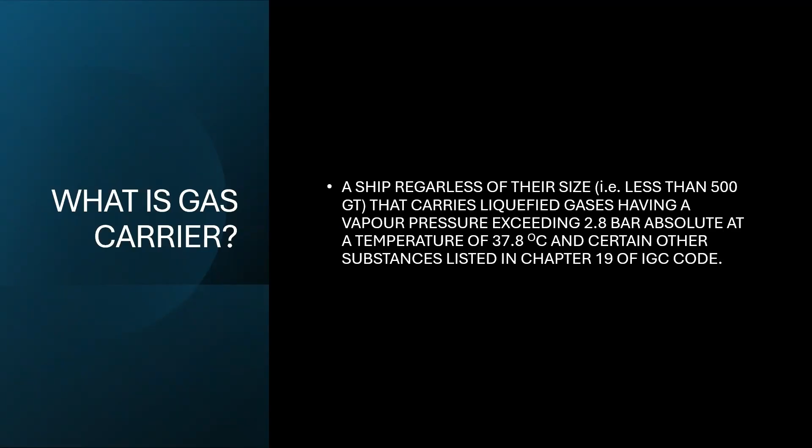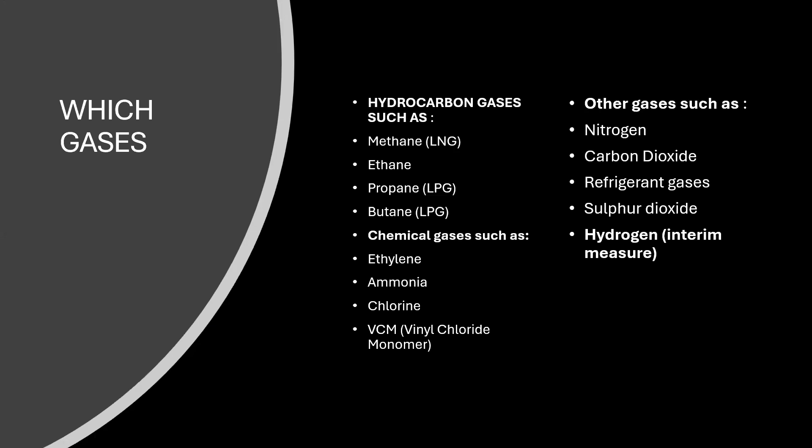Moving on, we will understand now what those gases are. Here I have just identified very few. There are close to about 100, I think, listed in chapter 19.

Quantity shipped is very less, and similarly VCM or vinyl chloride monomer, all these are basically used in the chemical industry. When we look into other gases, you have nitrogen, which is basically an inerting gas which is used, and carbon dioxide is used in the food industry.

There were dedicated, say 2000 cubic, about four gas carriers dedicatedly built to carry carbon dioxide, basically in Europe. But now it has come into more prominence because of our IMO direction, to capture all this CO2, and now we want to pump all this CO2 back into air pockets which we have harvested for crude oil and all, and we are storing it.

So now larger and larger gas carriers to handle and transport this carbon dioxide are coming. It is coming into the forefront. The smaller vessels were there, but now larger vessels are being designed, built, and recently started operations. Refrigeration gases were also carried on gas carriers, in limited quantities.

And we'll move on to hydrogen. Now this is another thing which is coming up. We will touch upon LNG, LPG, ammonia, methanol, all those things. Everything is basically transient in nature, but the fuels of the future which will be prominent are most likely hydrogen and nuclear.

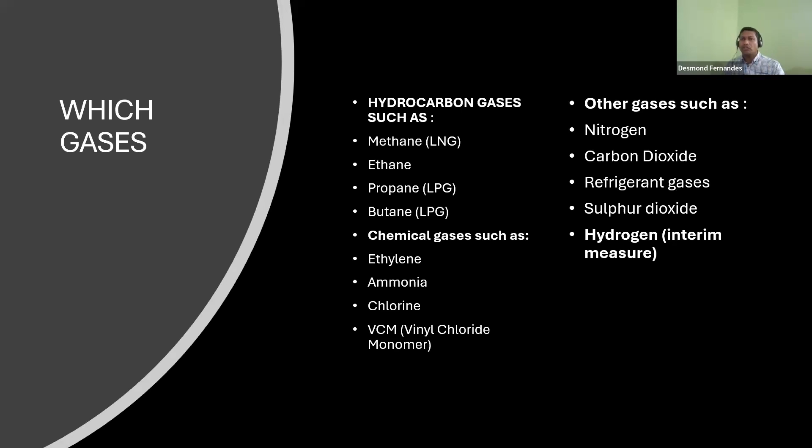So in the definition we said that regardless of size, we also said liquefied gas. So now that is what we have to understand. What is this liquefied gas? Why do we have to take it? Why is it necessary that we have to liquefy this gas?

When we talk about it, the ship is only a part of the tool in the logistics. We are using the ship to basically transport something. In case of gas carriers, it is the gases which we transport. So the main part over here is that it is part of a logistic chain which we have to understand. And when we talk about logistics chain, it is more of a commercial thing which basically comes in, and the basic golden rule is economic of scale.

This economic of scale has influenced shipping in a very drastic measure. Over a period of time, if you see the trend, ships are getting larger and larger. Why is it so? Because of economic of scale. Similarly, how does it become economical to carry these gases between different ports, basically a production location and a consumer location? That is what basically drives and controls this market.

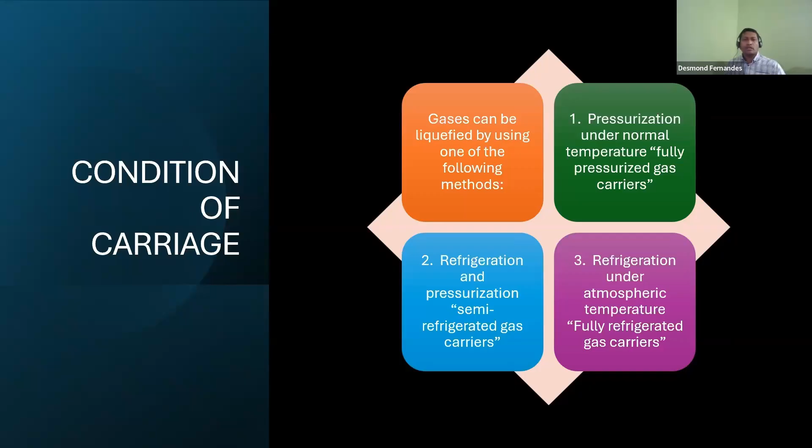Here I want to touch on another thing. Some gas carriers are only designed to carry one cargo, some ships multiple types of cargo. So that varies, and that's where a little bit of complication comes into the picture, but I will touch into it so that particular concept also gets cleared up for you. So we will just try to understand what is this fully pressurized gas carrier and so on.

So the pressures are basically 17.5 bar to about 20 bar, depending on what they are designed at. The tanks are basically equivalent to your air bottles at those 17.5 to 20 bar pressures. Obviously capacities are quite less, because what you will find is the thickness of the material is more, so the corresponding weight is also more. The temperatures it can handle - these are typically designed at 0 degrees, but it can handle down to minus 10 degrees while loading. So you cannot load a gas below minus 10 degrees, which is very important.

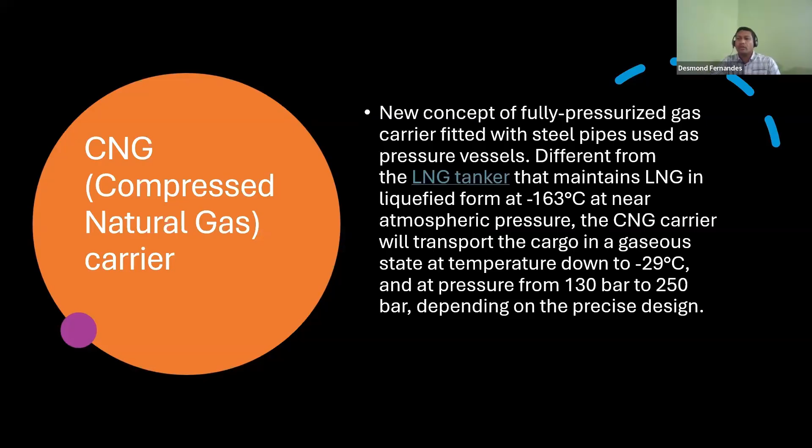They can again carry your LPGs, your VCMs, but another cargo they normally carry is ethylene. Ethylene, when we talk about it, goes to minus 104 - we will understand that. Since this is semi-pressurized, the pressure range is 5 to 7 bar. In the fully pressurized ships we saw 17.5 bar; here it is 5 to 7 bar, and it can go to, typically if it is LPG and such, minus 48 degrees, or minus 50 degrees. So then basically they are capable of handling your LPG cargoes also, in the fully refrigerated range.

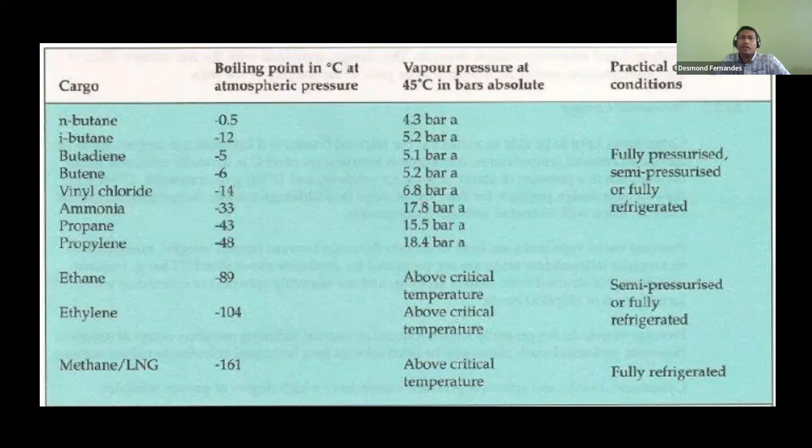Let us go back again to the previous slide. So here we have seen negative temperatures. Water freezes at 0, correct? So at this temperature, if there is water, it will form ice. However, the technical word we use here is hydrates, not ice. So if you find water over there, it becomes hydrates.

How does water come? It could be while putting inert gas in the tank. We remove the air by inerting, and then we take the gas over there. So if there is water in the inert gas, that is your source. Then we talked about liquefying, refrigeration. In a typical refrigeration plant, in the condenser you find water, right? Something similar plants are used on board also. So if there is a leak in your condenser, you find water in your tanks, or you load the cargo with contaminants itself. So these are some of the ways water can be found.

Sometimes this cargo also reacts with itself, like aging. There is a lot of talk about your VLSFOs, no shelf life, consume it within 12 months because it ages and segregates, decomposes, changes its state. Something similar you can observe with a few of the cargoes also. They have a very short shelf life, and they are also transported with inhibitors, depending on the cargo.

Then a few of it also reacts with the air. If there is air, then it will react and start changing its form. And also with other cargoes, for example, like we spoke about this VLGC. They are designed to carry LPG, that is propane butane. They can also carry ammonia if designed so, but then they are not compatible. So you have to do inerting with one cargo and then introduce the other cargo. So those are the things.

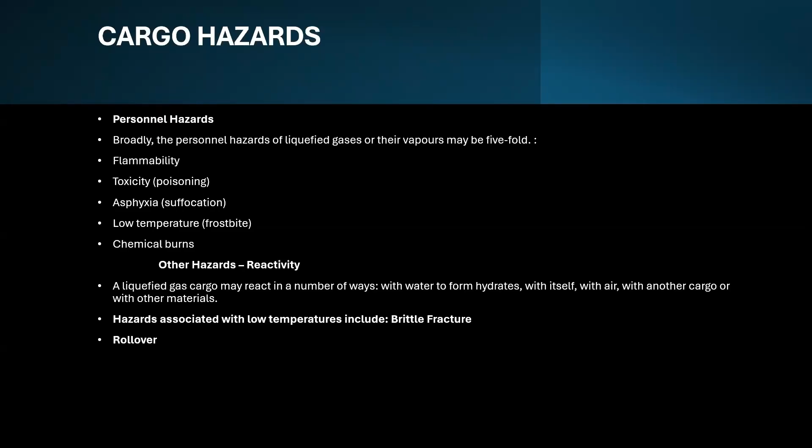In rollover, what basically occurs is in your LNG ships, this is more pronounced. There is a stratification. So if you take a tank, say 50% of the tank, you divide the tank into 50%. The top half will have LNG as cargo, but the density is much higher, and the bottom part, the density is lower. This basically occurs when it is on a long voyage, it doesn't happen in an instant. So over a 2-3 week period, you find that stratification is occurring, wherein higher density accumulates on top, lower density at the bottom. Now the natural tendency is that higher density has to be lower, the lighter particles basically on top. That is the natural tendency.

So obviously as the weight increases, it reverses, changes over, and this is an instantaneous process, and it results in stability issues. Now try to relate it with your naval architecture. As density increases, the weight will also increase, right? And within a minute or so, imagine it is just changing over. So there is a change of weight, so your metacenter and those things will change, and it basically affects the stability of the vessel. So that is what rollover is all about. These are a few of the cargo hazards.

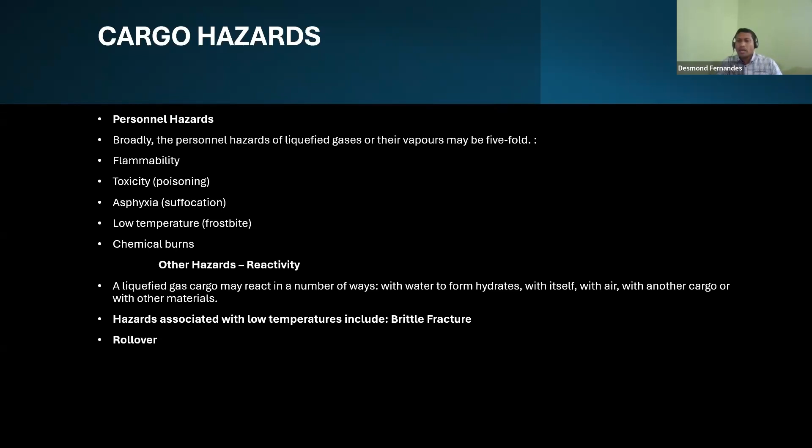So in order to have control in all of this, IMO basically came up with a code, the IGC code, short form. Full form it stands for International Code of Construction and Equipment of Ships Carrying Liquefied Gases in Bulk. It is a mandatory requirement under SOLAS Chapter 7, and it has been since 1986. The latest version is 2016.

Now what does it govern? It basically looks into the design, the construction, and the equipment which have been fitted, with the lens of minimizing risk to the ship itself, to the crew, and to the environment. These are the major focus.

Now here I'd like to tell you something. You must have read in the news, LNG is coming in a major way for use as a fuel for propulsion of the ship, for generating electricity on board. Similarly you will find LPG also being allowed, and hydrogen is also coming. Originally, LNG was the only gas allowed for propulsion purposes on a ship. LPG was not allowed. LPG and all basically came under the IGF code.

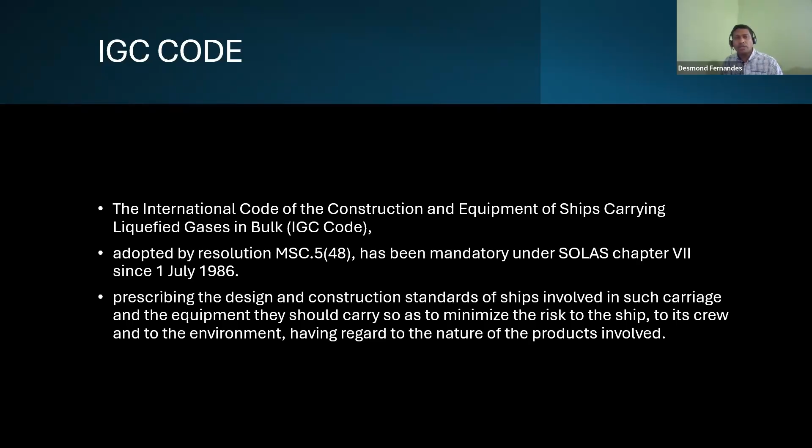Since the IGC code specifies how the ship is designed and constructed, we'll see which are the special features. We'll look into the special features which make a gas carrier apart, based on the cargo it carries, the physical aspects of it. We will try to understand all those.

One thing you will find on a gas carrier, especially semi-pressurized and fully refrigerated types, is something known as an airlock. As we've said, these two ships will have a refrigeration system to cool down.

You can relate this to a normal refrigeration system on board, like for the provision system or the AC. You have a compressor driven by an electrical motor, that is your drive, the prime mover. Similarly, here you have a compressor driven by an electrical motor. We keep both pieces of equipment in separate compartments, and the drive shaft passes through a bulkhead common to both compartments, with a gas seal provided on it. The electrical motor room is known as the motor room, and the compartment where the compressor is located is known as the compressor room or cargo compressor room.

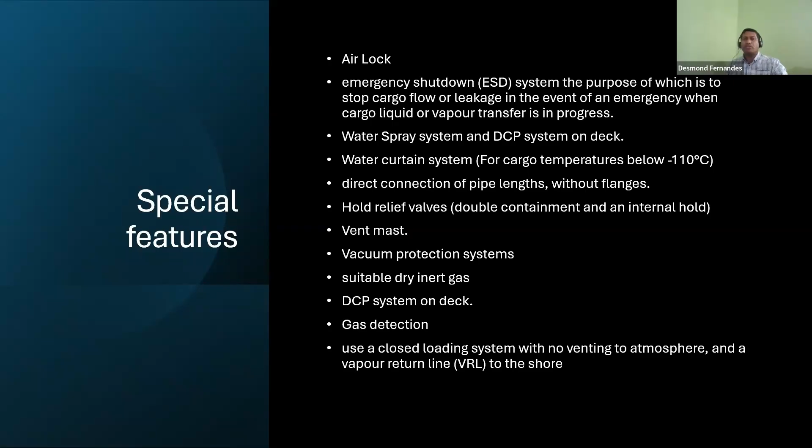Now having known this, we will try to see some of these features on a gas ship. Moving on to a pressurized ship, you will see your cargo tanks, just like your air bottle tanks, basically placed in your cargo hold. Part of it is protruding; it is just directly painted, there is no insulation involved here.

This is your actual metal. Only for corrosion and all, you are doing the normal painting and paint schemes which are there.

Here you will find basically your mast which you can see, one mast for each tank, dedicated ones. The relief valves basically will be connected to those, so anything venting is on top, so there is no accumulation in way of the tanks.

Second thing, over here in the aft section, you will see the electrical motor with a straight drive to a centrifugal pump. It's a cryogenic pump which is basically used to pump. Okay, this is a straightforward system.

Things get complicated in a semi-pressurized system. Here you will find one specific room on the deck which is known as a compressor cum electrical motor room, where the refrigeration system - actual word is reliquefaction system or plant - that is the word being used. It's basically a refrigeration system where the compressor and electrical motor are used.

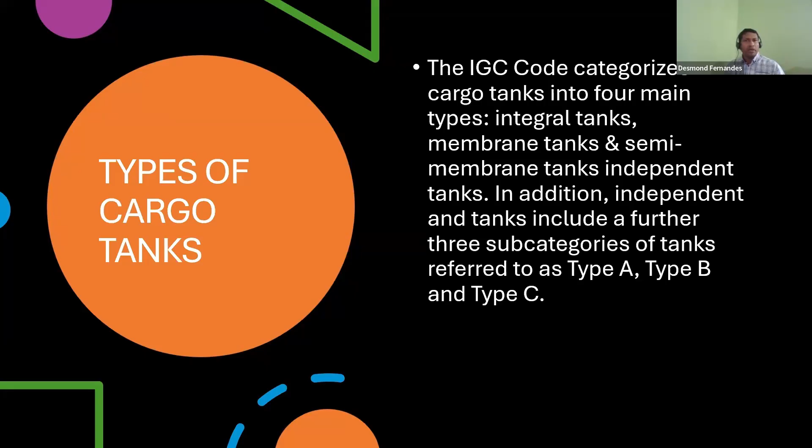So we will just try to understand another concept of the tanks. We will understand the tanks. Now IGC code basically has categorized into four main types - integral tank, membrane tanks, semi-membrane tanks, and independent tanks. We'll just have a look at what those are. This is basically what IGC code talks about.

Integral tank is basically where the hull of the ship directly forms and contains the gas, and it is normally not allowed. So integral tank, they don't allow you to carry this sort of cargo.

Then the other one, like in LNG ships and all we have seen, is membrane tanks. The design part we will come to know, but here the requirement is they want a complete secondary barrier - so if the whole one tank is there, they want another concentric lining along the tank, so it's a tank within a tank, you can understand. Then you have something known as semi-membrane tanks, which basically again want a complete secondary barrier.

And the third one, fourth one, which is important and predominantly used in gas carriers, are independent tanks. So there's an individual tank basically placed in the hold of a ship. They are subdivided into Type A, Type B, and Type C. In Type A, basically a complete secondary barrier is required. Type B is partial secondary barrier, and Type C there is no secondary barrier which is required. We'll look into why it is what it is.

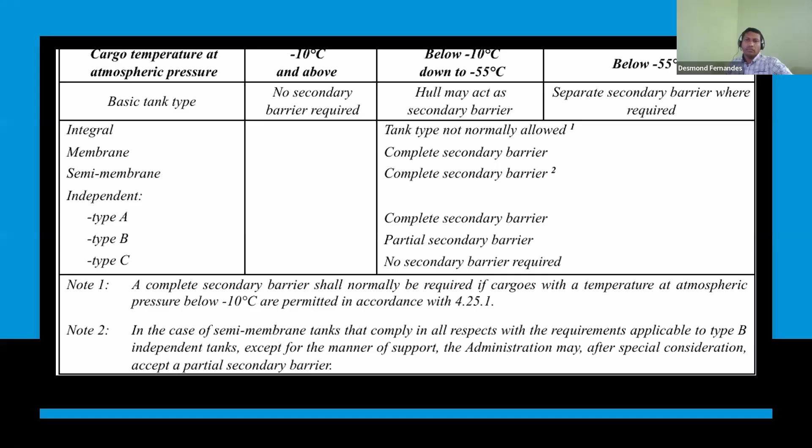Don't get confused into all those. So here another thing is below minus 10 degrees down to minus 55 and below minus 55. So predominantly this is what it is. You will find membrane tanks which have taken utilization, and independent tanks which are predominant. Other types are not generally used or favored, like the tilt is towards that.

So we will understand now what is this independent tank. You see this is the outer hull of the ship. Then you have hopper tanks, water to carry water ballast, and you have a double bottom for water ballast. So in between you have that space, the hold space, right? In that you have a tank which is placed. Now this design is prismatic. It looks like a prism, correct?

So we have seen now a prismatic Type A tank basically will require a secondary barrier, a complete secondary barrier. So that is basically what you can see inside the tank. You find a little bit of insulation, and then you have another basically tank lining which comes into the picture. So tank within a tank.

These are basically supported like foundation of a main engine or pumps and all, you will see, but it is not bolted like those engines or pumps that you normally see. You will find that there is a wooden piece, a special type of wood basically, and it is just rested on that. So if there is water and all, if there is a rupture in the hull, say side shell, and water will come in, depending on how much water, and if it is filled with cargo, because each cargo has its own density, these tanks can float and displace. They are basically within a tank, just placed. It is not secured. So that is what the main thing is.

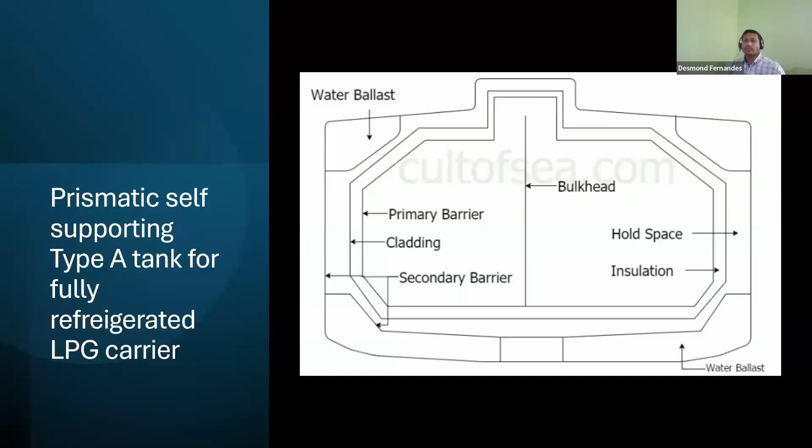So what you have is basically a small tray beneath, which is of low temperature material, right? And if there is any leak, basically it is contained. Now all the secondary barriers, when we are talking about, IGC talks about and tells that they have to design such that it has to hold that cargo for a minimum of 15 days. In this 15 days, the moment you discover, then you have to go to a port and all, and then you have to discharge the cargo. So it gives you that 15 days grace period to unload it.

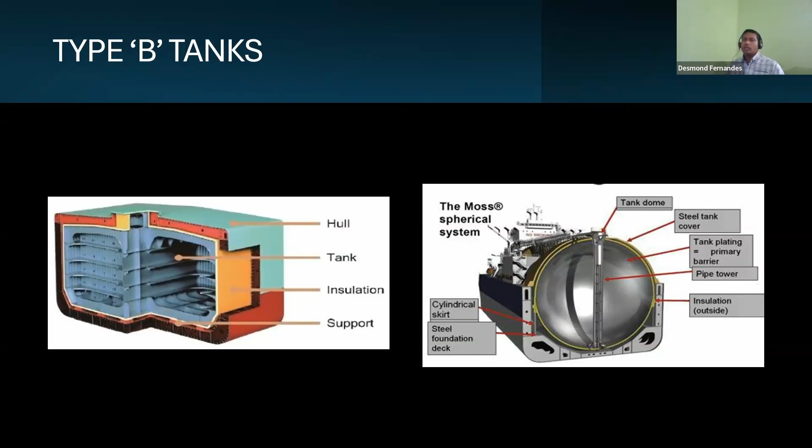Now this SPB, what I talked about, if that particular tank is installed, it has a flat deck, same to what you will find as an LPG ship. These ships were, again, the cost factor of those are higher, so they are not being utilized as a project. Only two ships or something were built and they were running, so most likely they are close to, either scrapped or at the stage of scrapping. These are quite old ships.

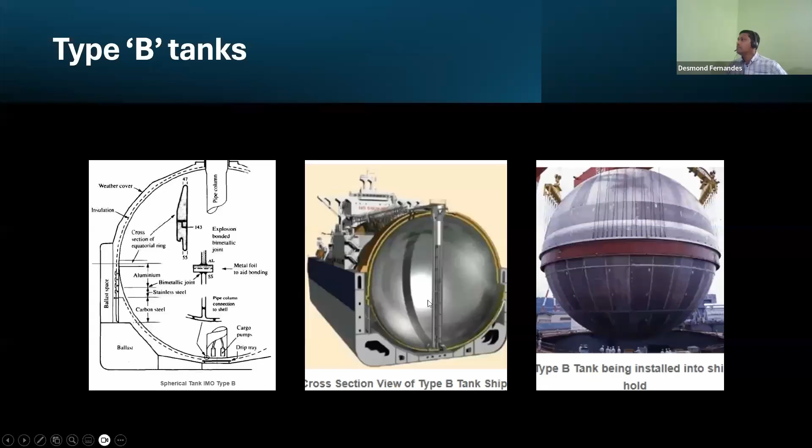This particular tank technology is not predominantly favored. Here you can see on the right hand side, this whole aluminum based tank, with a nickel alloy, being fabricated, and then they are basically lowered in. So this is how they look. These are type B tanks, independent type B tanks.

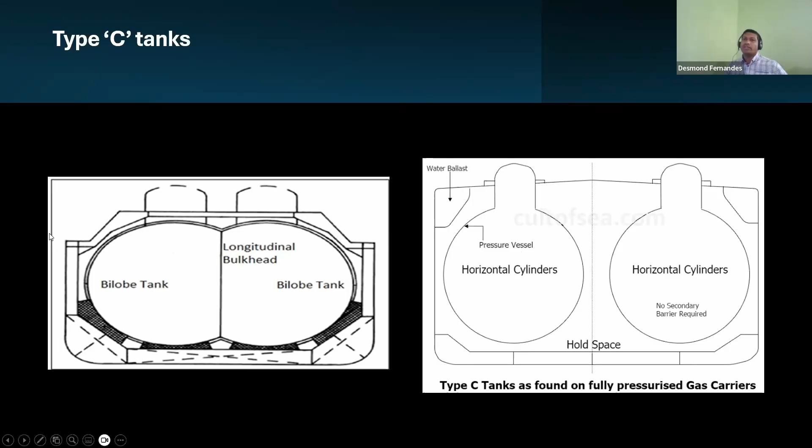We'll see another picture wherein they are installing. You see, the outer hull is prepared, the hold is there, and these tanks are just lowered in, and then they are going to cover it. So these are individual tanks lowered.

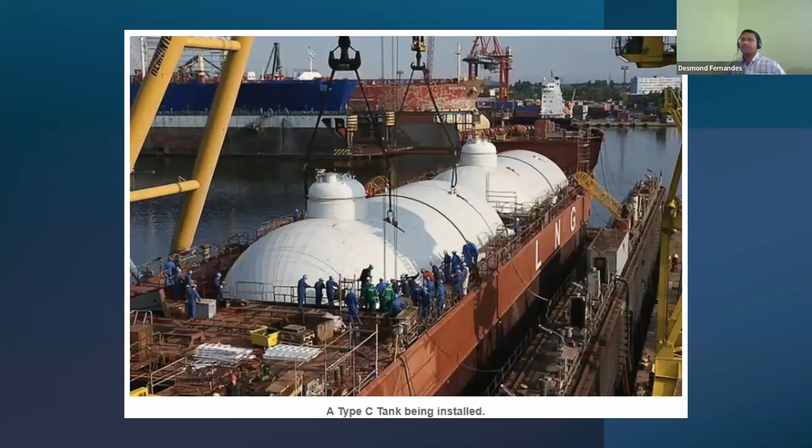We'll look into membrane tanks. These are basically what you will find on ethane carriers and LNG carriers. The outer hull which is there, you have this as ballast tanks. Against that you will have the first plywood or something which is put, in which basically you will have insulation. Then you will have the first metal sheet which comes, and it is known as the secondary membrane.

On top of it you will find another insulation layer covering. Membrane we have seen, complete secondary barrier as per IGC. So you have the secondary barrier complete throughout, and then you have the primary barrier, in which the sheet that is there will be in contact with the cargo.

Now in between you'll have towers in the tank, wherein the pumps - main cargo pumps, stripping pumps, spray pumps, depending on the type of system - will be mounted. And here you will have another small opening which is only opened for the gases, where the vapors are removed, known as a vapor dome. So you have a liquid dome and a vapor dome.

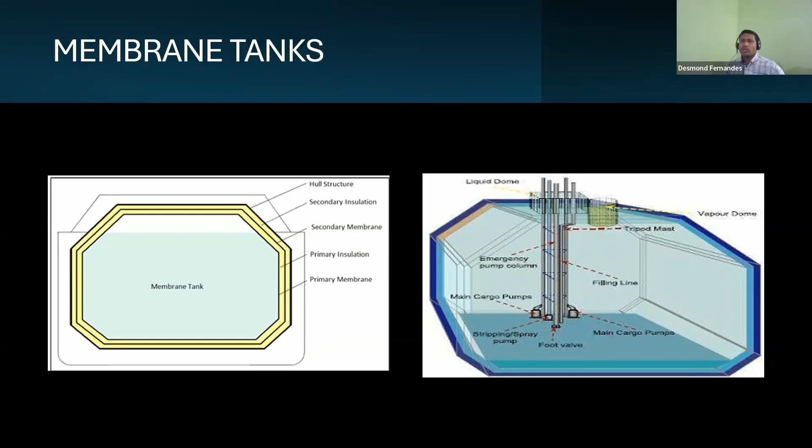So we'll just look into an actual tank. Again, it is a prismatic design, with the tower which you can see supporting the pumps. This is not touching over here, there is a clearance, and it is a floating design. Whatever weight of the pumps and everything is basically on the top - that is the main highlight here.

The design for this prismatic type - we have seen these are like sheet metals, and it is basically clinging on to the insulation, and then the plywood and all, which we will see in subsequent pictures. So what you will find is, if liquid is over here, there is a lot of sloshing, and there is no division within the tank, which can get destroyed.

That's the reason why there is a limitation - you cannot load half of this tank and sail, they don't allow it. Only LNG ships used for bunkering, within port limits, are allowed. But if it is sailing, they are not allowed.

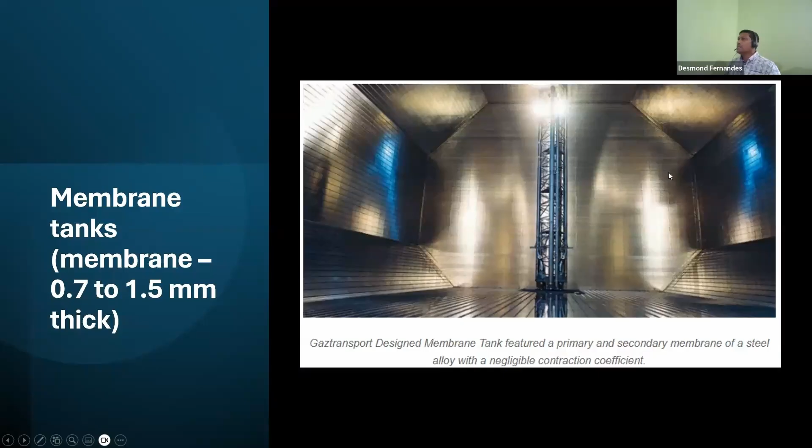So you have to have the liquid somewhere around a certain level. Obviously you can see the surface area and the volume is quite less, so if there is movement, the sloshing load will be much less, or it will be closer to a minimum - that is another design feature which you will usually see.

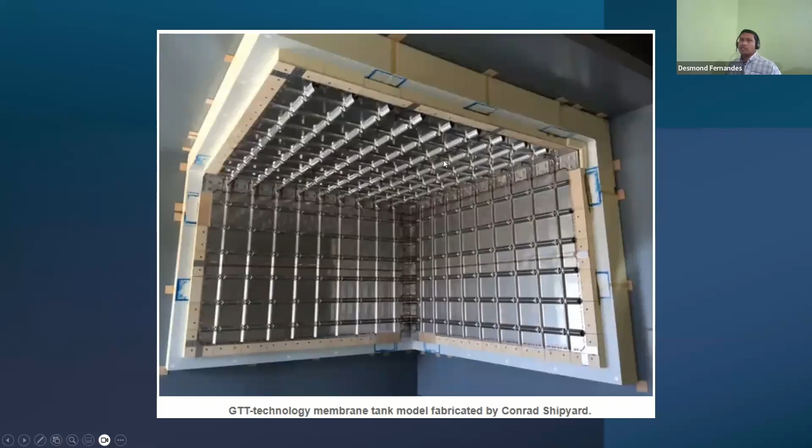So here you can see this sheet metal example - it's basically bent for two reasons. One is to give strength, because complete sheet metal if it's plain will not resist forces. Second is to allow for expansion and contraction because of cryogenic temperatures. This bend basically takes that, and then you'll find all this insulation held in place. I have a few more pictures to show you.

You have like Mark 3 and NO96. The main difference here is the material. In NO96 you'll find Invar being used, and the thickness is 0.7 mm. When you install Mark 3 systems, you normally use stainless steel of 304 grade, with thickness about 1.5 mm. Then the type and thickness of insulation also varies - that's what makes things different here.

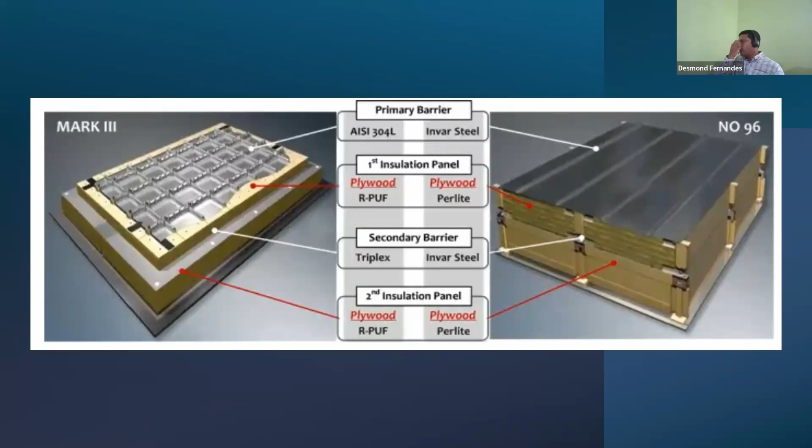These are the main highlights - what matters is reducing the boil off. Boil off means how much vapor generation is controlled relative to the total capacity of the tank. So here we can see the sheet metal, how it's done - it's cut and prefabricated, then just assembled in the tanks. So these are all about membrane tanks.

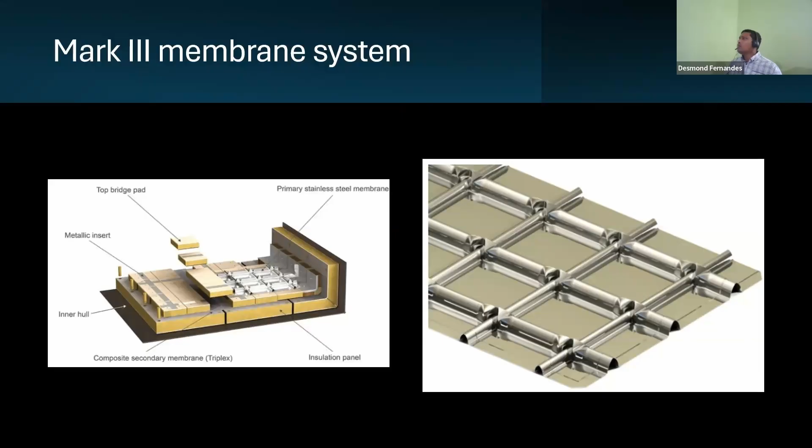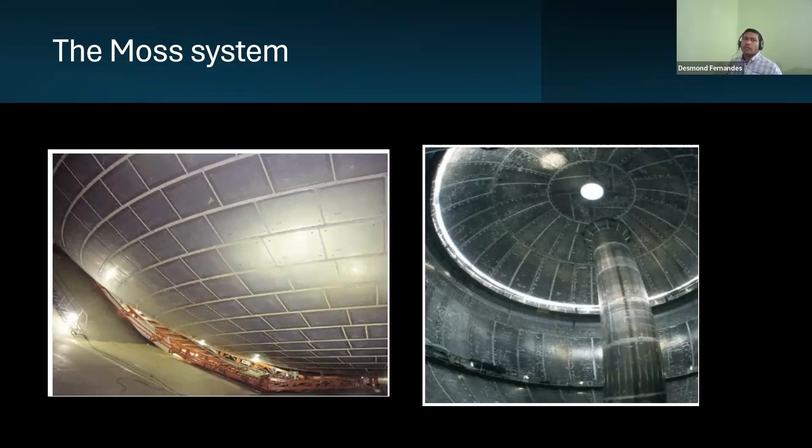Then we will just touch upon how pressure is controlled. One thing we've mentioned is reliquefaction of cargo vapors - you have a refrigeration system basically equivalent to the one you have on ships for accommodation or provisions. You take the vapors, compress them in a few stages - two or three-stage compressor - send it to a condenser, liquefy it, and that liquid is sent back to the tank.

Now what happens is this becomes very uneconomical when we come to methane. So you might utilize something known as thermal oxidation, which in simple terms basically burns the cargo - whatever vapors are generated, you just burn it off. It's a huge tower with a pilot igniter or spark plug and blowers. You're dumping in a lot of air, opening these vapors into it, and just burning it off. Also known as GCU, gas combustion units - these are also used to control your tank pressures.

Another thing is pressure accumulation. What you'll find is some designs will have dual pressure rating - sometimes you'll find sea mode and harbor mode. Sea mode is normally the lower pressure. In harbor, when you're loading and such, pressures will go higher, to buy more time to use your reliquefaction plants and bring it under control. So you can choose to change the set point of the relief valves to a higher value.

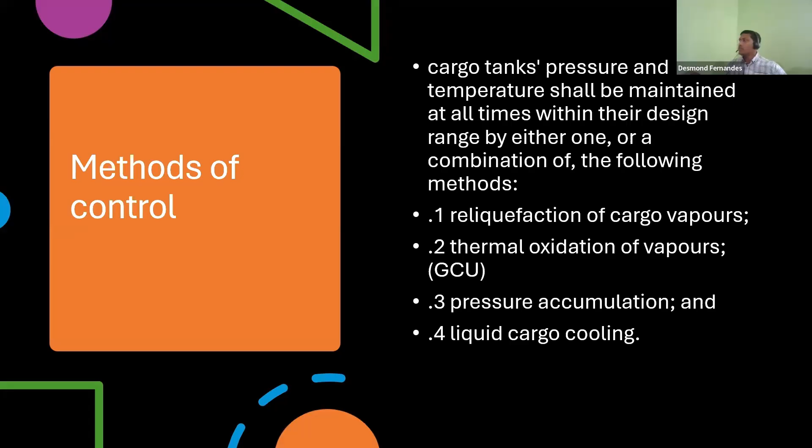Then you have liquid cargo cooling, wherein the liquid is taken from the tank and passed to a heat exchanger, using nitrogen and refrigeration plants to cool it again to say minus 167, and then you resend it. So here you are not cooling the vapor in liquid cargo cooling, you take the liquid which is close to say 160.5 or 159.2 degrees, that is the temperature of the liquid - it is in liquid form itself. You take it from the cargo tank, cool it to minus 167, and return it back. So that is also being employed to control.

Going forward, in the reliquefaction plant or refrigeration systems, you have direct systems, indirect systems, and combination systems also - multiple types. On LPG ships, you usually will find direct systems. On ethylene carriers, you will find indirect systems, where another refrigerant goes into a heat exchanger, and you take the vapors of ethylene, cool it, and redirect it.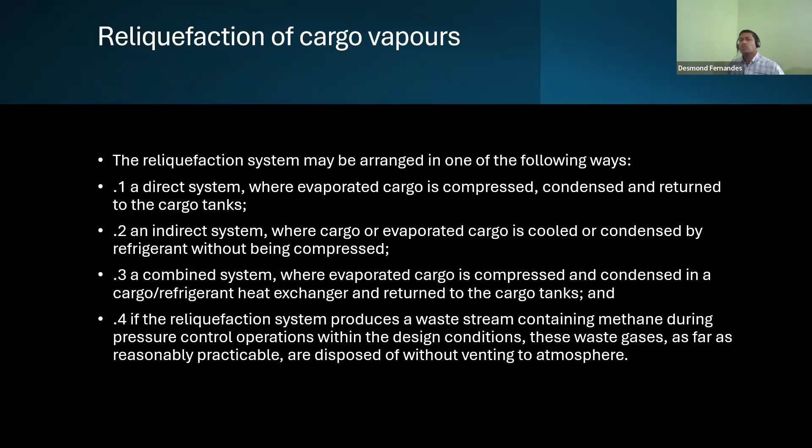So these are some means of handling cargo vapors, care of cargo during voyage and also during loading times. So moving on to the last topic - I've exceeded the time, thank you for being patient.

So we will just try to understand some of these cargoes the gas carriers are using - they found their purpose as a fuel. We'll start with LNG because that was the first thing which basically came into the picture.

I also mentioned that they are transient in nature because compared to liquid fuels like VLSFO and LSMGO that we are using, the carbon percentage is less - that is the reason why this has been chosen. Secondly, there is usually no sulfur present in LNG as well as LPG, so it's close to nil SOx production. Why it is not zero is because you are using pilot fuels to ignite these fuels, and these pilot fuels use LSMGO again, so that does produce a little bit of SOx.

So it's about 25% less carbon dioxide being formed compared to 80% less NOx being generated. One important thing here is direct gas injection - usually you use gas vapors and then inject them. But in LNG engines like ME-GI engines, they use diesel cycle, then you have these 50DF engines, Wärtsila ones, which use Otto cycle basically - there it is mixing. You take the vapor, and during the suction stage, since the charged air from your turbocharger gets cooled in the air cooler, once it comes inside the combustion chamber, that is the time when you're injecting this vapor - LNG in vapor form gets mixed and then you're igniting and burning it. So those are the types of engines you will find.

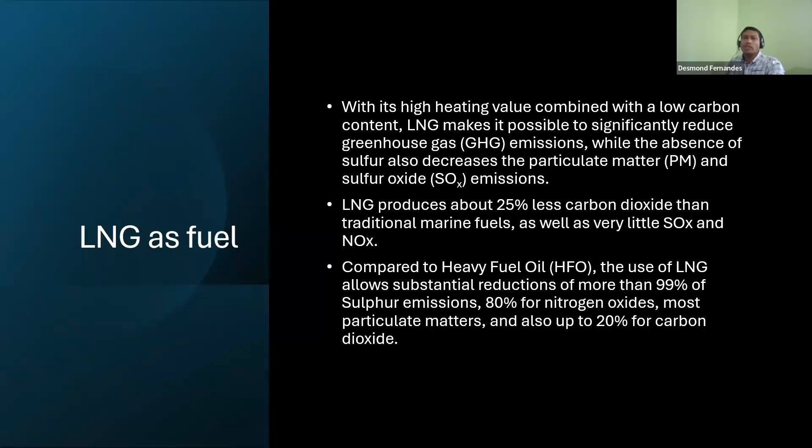Moving on to LPG, you will find that pilot injection is also required here. It produces 95% less SOx emissions, quite less. You can use Otto cycle also in this, but the main difference with LNG is you are injecting LPG in liquid form into your combustion chamber, not in vapor. So the moment you inject, that mist formation basically vaporizes. This is known as liquid injection in engines specifically designed to consume LPG on those ships.

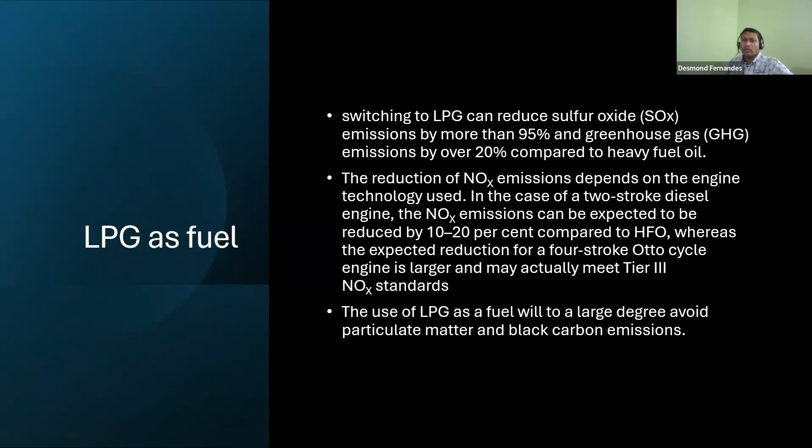Then another thing is about ammonia. Now LPG - they are basically used on gas carriers who are carrying that as a cargo. Similarly, ammonia - presently few ships are being designed that will carry ammonia as a primary cargo. However, these engines which have been designed can basically cater to ammonia or LPG, because that flexibility is provided, since gas carriers can be utilized to carry either of the cargos. So when you have that cargo, you're basically utilizing it for propulsion. Ammonia has come into the big picture because there is no carbon involved in it. But then production does have issues to produce it.

When we are looking at well to wake, they are diversifying it into brown and green and all those color codings.

However, this ignition quality is not very good for ammonia. When it is ignited, there is basically an explosion kind of thing. So they are trying to control that so you have more running hours of your combustion chamber spares. Another disadvantage with ammonia is a lot of NOx which will be produced, since nitrogen is there.

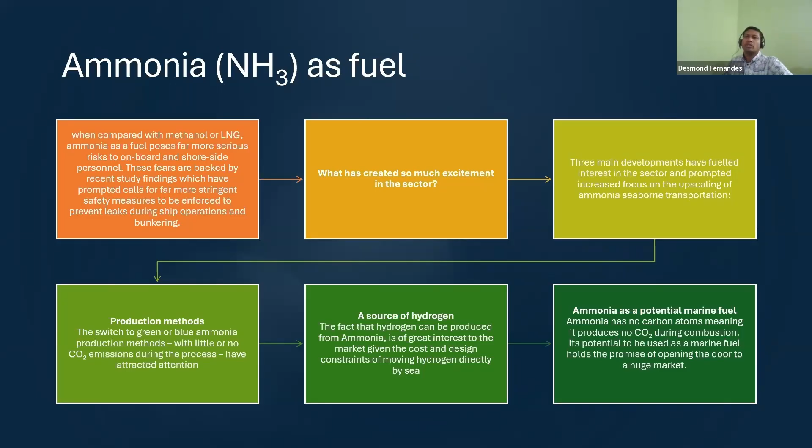So recently, just this week, at the beginning of the week, at the Gastech forum, there was the first ship with nuclear propulsion which has been signed in Korea. Looking into hydrogen, this is a unique challenge because the boiling point is minus 252.9.

And then temperatures. So they are talking about ammonia, which will be a carrier. Ammonia is only minus 33 degrees, so you don't require such cryogenic states. And then to reliquefy it to negative 252.9 degrees, you can just imagine the amount of energy that will be required.

So these are a few challenges that they are basically facing. This is basically in a development phase. And another thing is energy density, and its flammability also.

Flammability - maybe in old movies you could have seen these airships, huge balloons during World War which were basically carrying hydrogen. Those balloons were filled with that for lift, and then you had fans to guide and navigate. But they were prone to fires because it is very flammable hydrogen. So that is another safety aspect that comes into the picture.

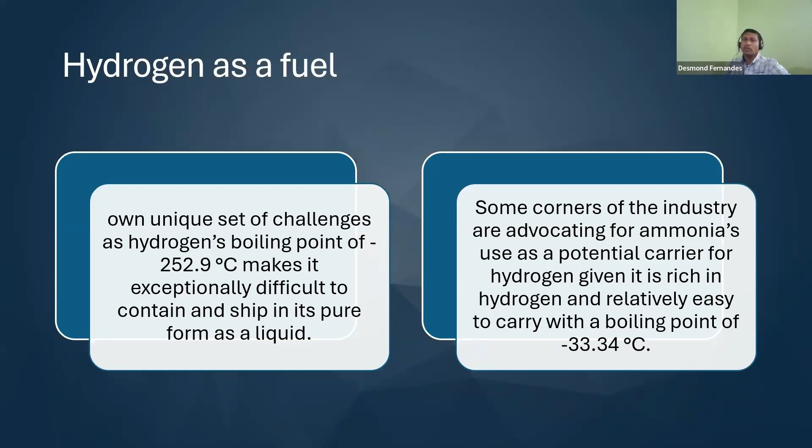Right, so these are the few gases which are being considered, and we will find more developments coming with all these projects. So with this, I conclude my presentation, and it's time for queries.